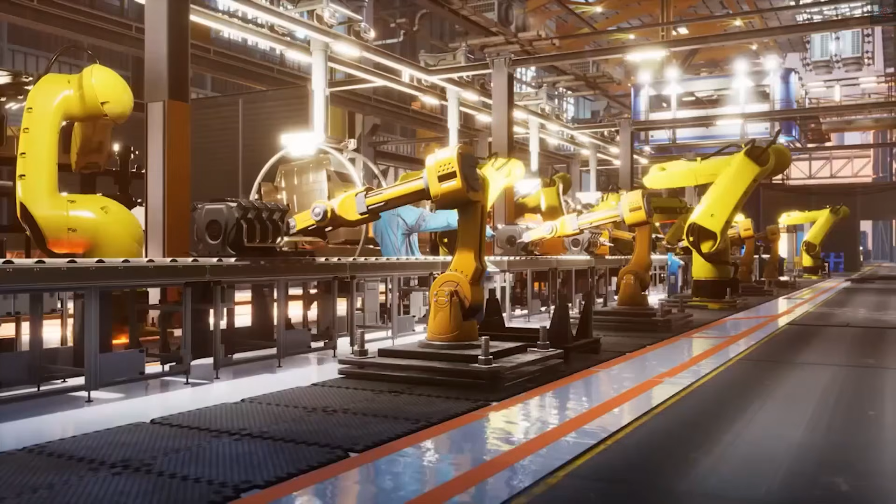Imagine a colossal industrial titan, a machine so powerful and sophisticated that it can mold massive sections of an entire automobile in a mere matter of minutes.

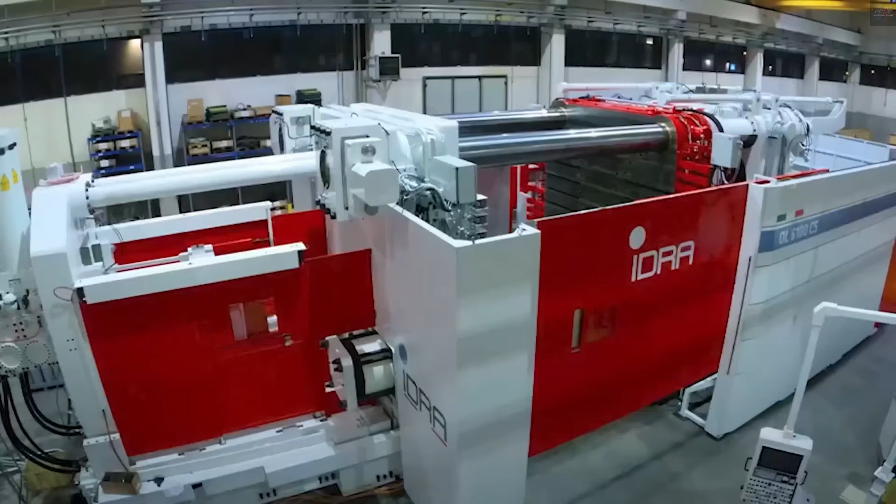This is not a scene extracted from a high-budget science fiction cinematic production. It is the unfolding reality of 2026. At the epicenter of this seismic shift is Elon Musk and Tesla, working tirelessly to redefine the very essence of how we construct vehicles. The catalyst for this transformation is the Giga Press, a piece of engineering marvel that has already fundamentally disrupted the global automotive manufacturing landscape.

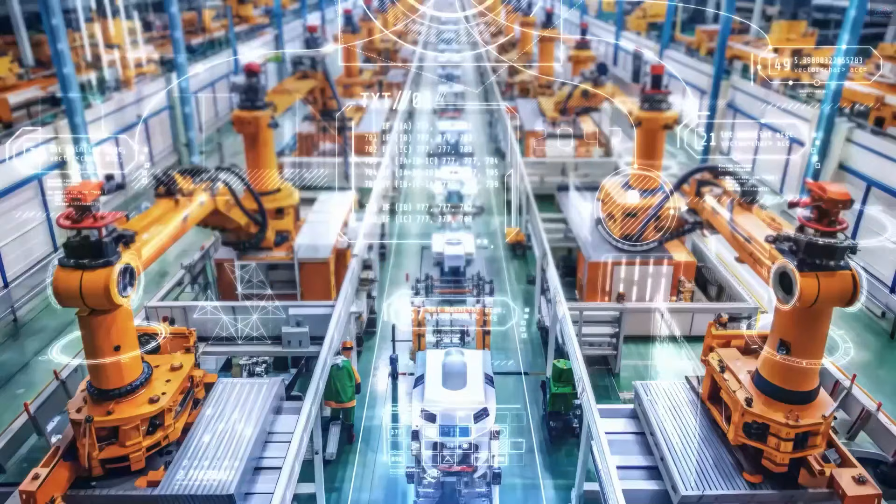In the conventional era, creating the rear underbody of a vehicle was a grueling, multi-stage ordeal requiring the meticulous joining of 70 to 100 individual components. Today, that entire complex assembly is birthed from a single, seamless casting. This technological leap translates directly into superior structural integrity, significantly reduced vehicle weight, and a production velocity that leaves traditional assembly lines in the dust.

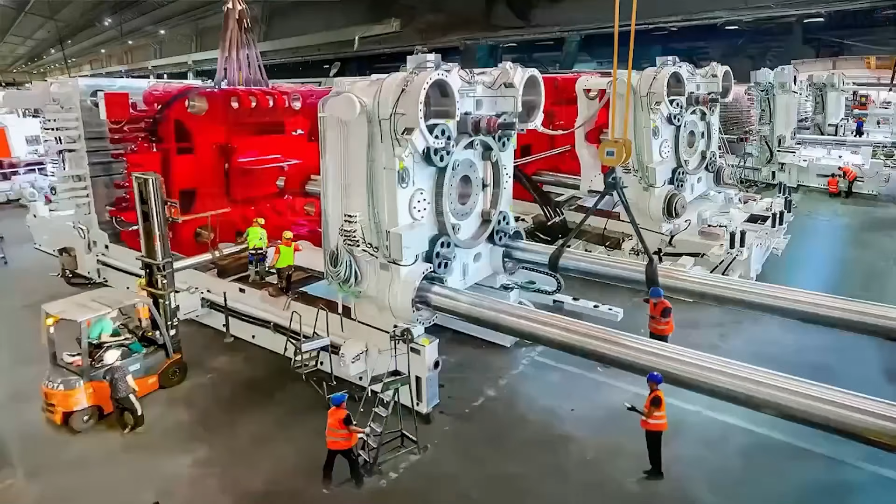However, the narrative does not conclude with current achievements. Tesla is now venturing into even more ambitious territory, developing machinery designed to cast nearly the entire skeletal structure of a vehicle in one definitive process. Consider the profound implications of such a shift. What happens when the traditional mile-long assembly line is condensed into a singular high-pressure event? What if building a car becomes as streamlined and efficient as 3D printing a consumer product?

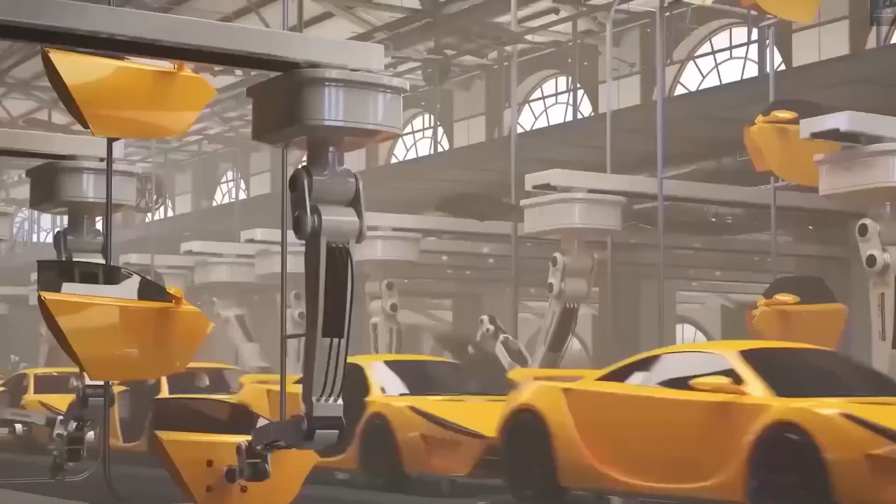This is the paradigm shift threatening to rattle the foundations of the global auto industry. But beyond the obvious gains in speed and fiscal efficiency, a critical question emerges. Will this innovation provide Tesla with an insurmountable competitive moat, or will it redefine the standard for everyone? To truly grasp this, we must look inside the belly of the beast, the Giga Press itself. How does this mechanical titan operate from within? Is it truly the ultimate manufacturing weapon of the next decade? The insights revealed in this exploration are vital for anyone seeking to understand the future of mobility.

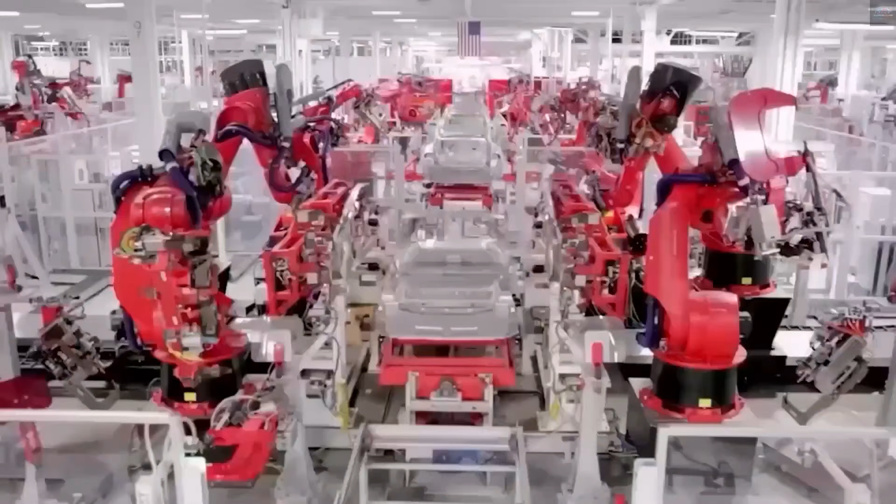To appreciate the brilliance of the Giga Press, one must first look back at the arduous nature of traditional car manufacturing. Historically, a car has never been a singular entity. It is a chaotic symphony of thousands of disparate parts, both large and small. The journey begins with the fabrication of individual elements: body panels, intricate chassis frames, suspension mounts, engine housings, and a myriad of brackets. These components are often manufactured in scattered satellite factories or sourced from a global web of third-party suppliers. Once gathered, they converge at the assembly line, where the true complexity begins.

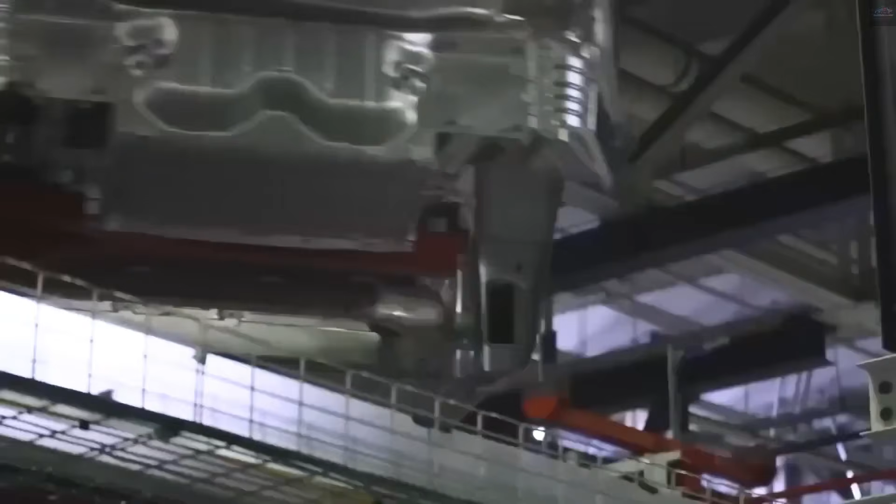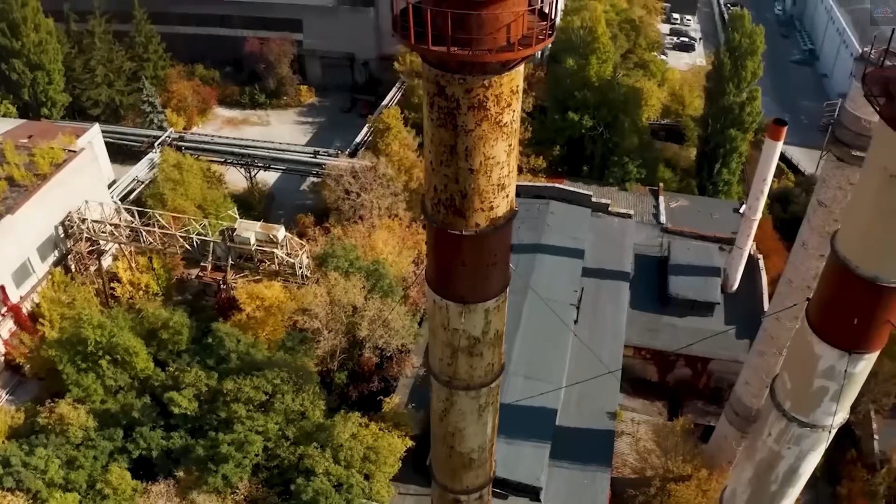This environment is a high-stakes jigsaw puzzle where every microsecond counts. At one station, robotic arms perform thousands of precise welds. At another, high-torque bolts are secured. And at yet another, panels are painstakingly aligned to ensure aerodynamic efficiency and aesthetic perfection. In a standard vehicle body, there are literally thousands of weld points. Each of these joints represents a potential point of failure or structural compromise. Wherever two distinct pieces of metal are fused, localized stress increases, creating vulnerabilities that engineers must constantly account for.

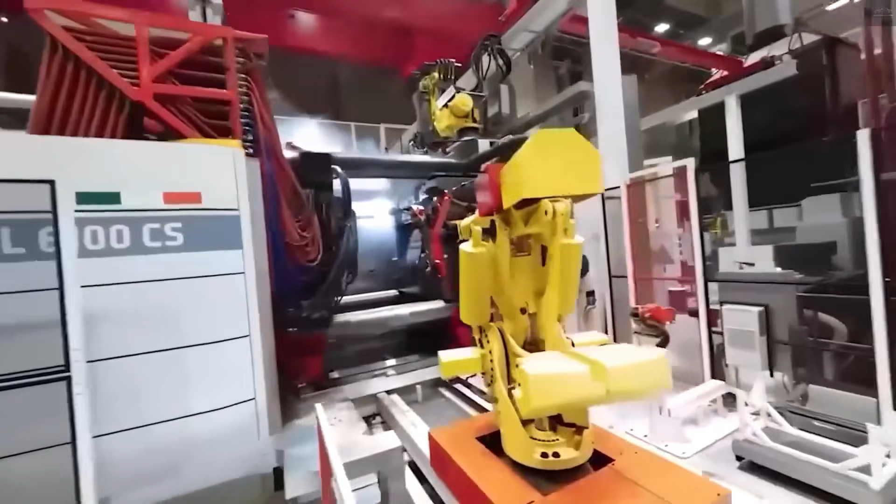Furthermore, ensuring that every single joint across thousands of units is perfectly aligned requires an exhaustive quality control apparatus. A mismatch of even a few millimeters can jeopardize the safety, harmonics, and longevity of the entire vehicle. Beyond the physical construction, the logistical nightmare of traditional manufacturing is staggering. Managing the flow of hundreds of parts, ensuring they arrive from stamping units or external vendors to the assembly line at the exact moment they are needed, requires a level of coordination that is both expensive and prone to systemic errors. Any delay in a single subcomponent can bring an entire multi-billion-dollar production facility to a grinding halt.

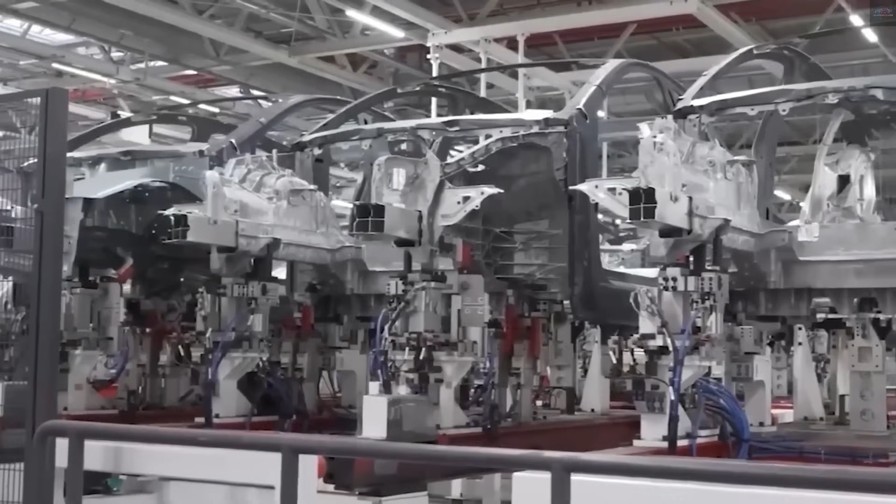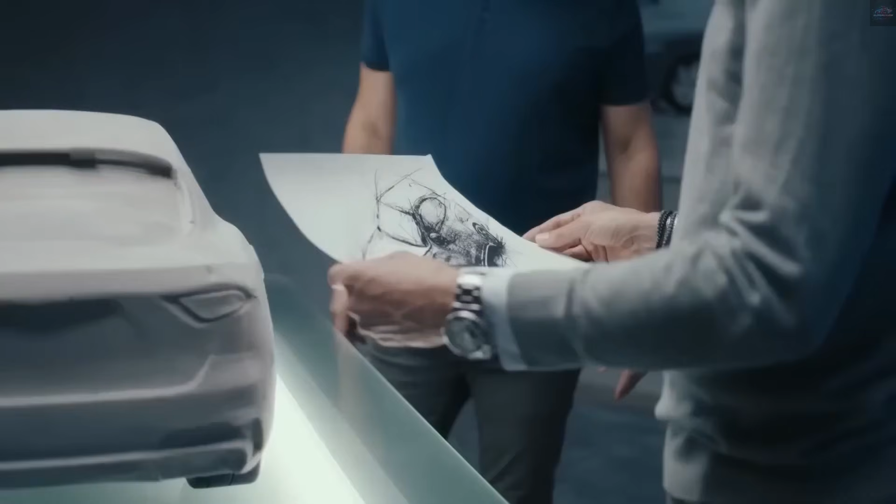This is the chaotic, fragmented reality that Tesla chose to challenge. Instead of iterating on a century-old process, they asked a fundamental, disruptive question. Why does it have to be this complicated? Tesla's philosophy was simple yet radical. If you reduce the sheer number of parts, you inherently eliminate the complexity, the weight, and the failure points associated with them. This realization birthed the era of massive die casting. By utilizing the Giga Press, Tesla replaced the nightmare of welding 80 different rear-end parts with a single, unified casting. Imagine the efficiency.

Molten alloy is injected into a precision-engineered mold under titanic pressure, and in seconds, a complete structural section emerges. No separate joints, no thousands of welds, and no logistical overhead for 80 different part numbers. The immediate advantages are undeniable.

Firstly, the structural rigidity is vastly improved because a monolithic part has no seams to crack or loosen. Secondly, the temporal savings are astronomical, as dozens of assembly steps are collapsed into one. Thirdly, the reduction in labor, floor space, and material handling leads to a significant decrease in the total cost per

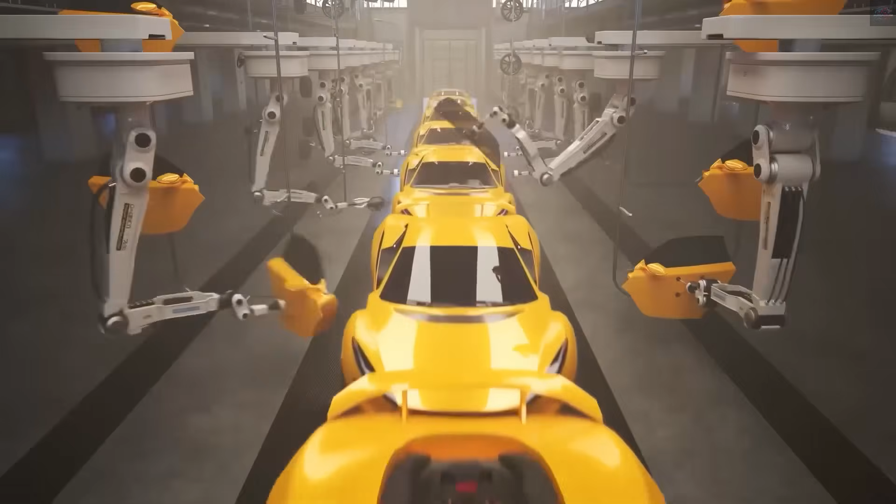unit. Tesla didn't just make a better part. They reimagined the very logic of industrial creation, proving that sometimes the best part is no part at all. What exactly is the Giga Press? The name itself sounds like something derived from a futuristic industrial manifesto, evoking images of immense weight and impenetrable complexity.

However, the core concept behind this mechanical titan is surprisingly elegant. To understand the Giga Press in its simplest form, envision it as a gargantuan molding machine. The fundamental difference between this and a common factory tool is the scale and the stakes. Instead of molding plastic toys, it is birthing the very skeleton of a high-performance electric vehicle.

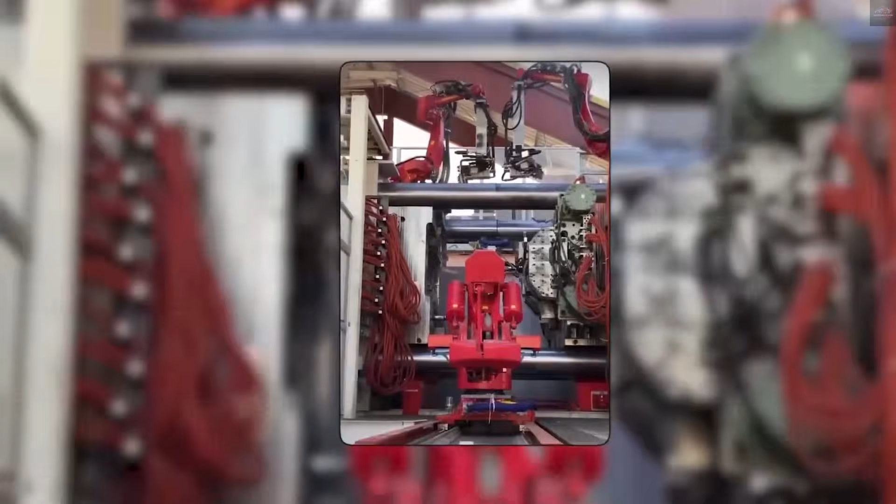Most of us remember the childhood fascination of seeing plastic injected into a mold to create a solid shape. The Giga Press operates on that exact same principle, but scaled up 1,000-fold. Instead of molten plastic, it utilizes molten aluminum alloys, and instead of a hand-sized toy, it produces massive structural sections that define the car's integrity.

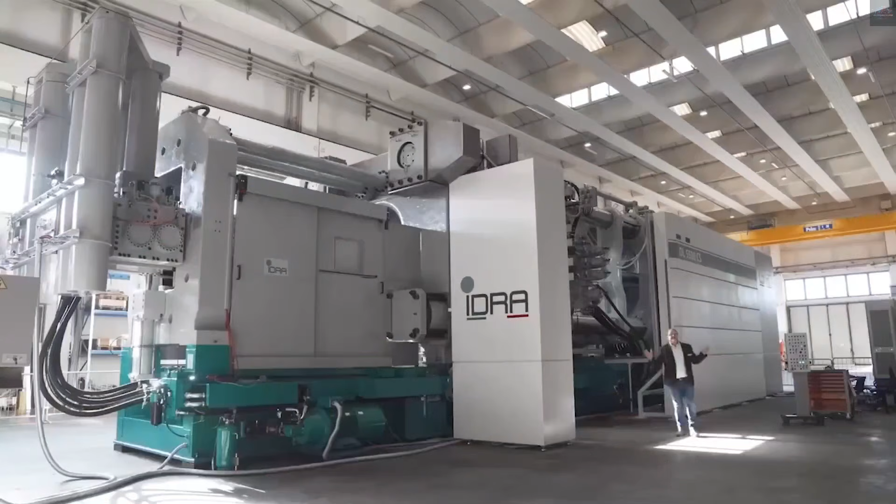Imagine a machine the size of a small suburban house. Inside this metal beast lies a massive, heavy-duty mold known as a die, which contains the intricate, negative space blueprint of a car's structural component. Into this die, molten aluminum, liquid metal heated to extreme temperatures, is injected under staggering levels of pressure.

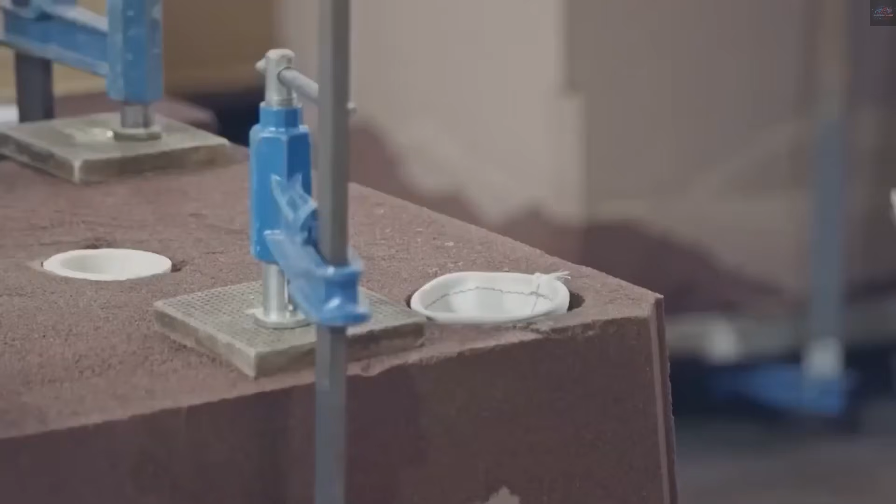This pressure is so intense and calculated that the liquid metal is forced into every microscopic crevice and corner of the mold, ensuring the final product is perfectly shaped. Within seconds of injection, the metal undergoes a rapid cooling process, transforming from a glowing liquid into a solid, rigid piece of engineering. The mold then opens and a fully formed, ready-to-use structural part is extracted.

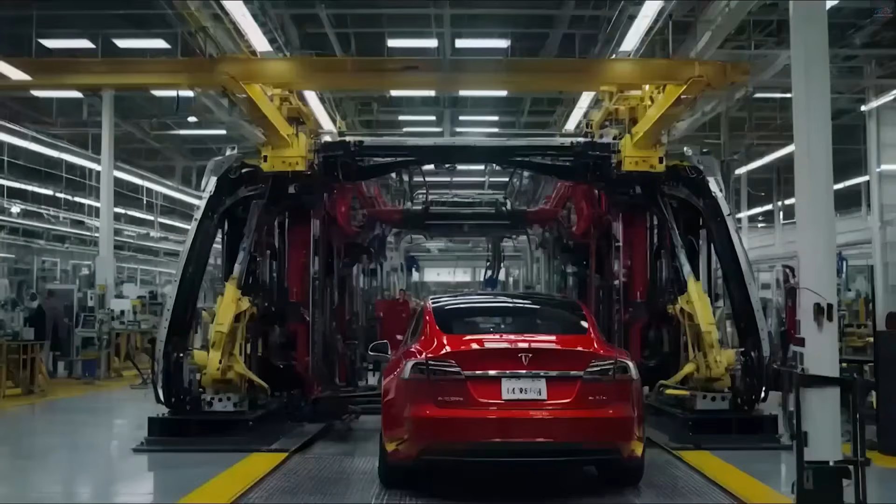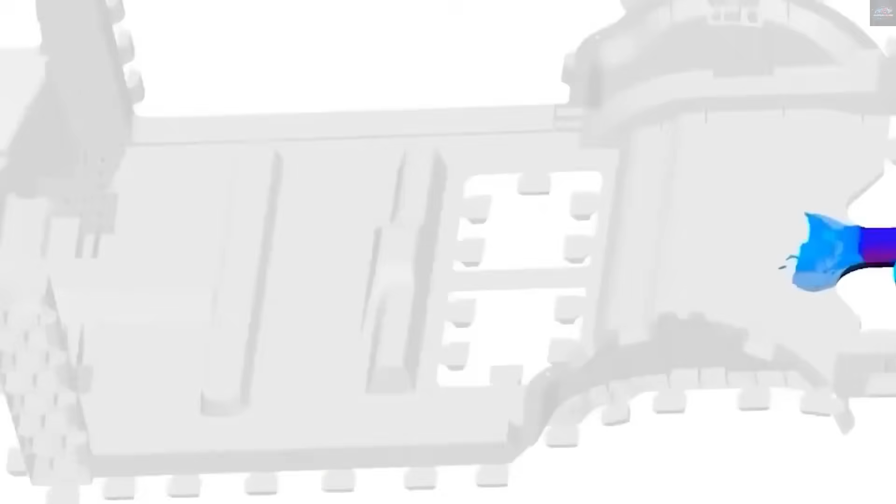This single, lightning-fast cycle replaces what used to be a marathon of welding, bolting, and manual alignment across multiple factory stations. However, we must understand that this is far from a simple pouring process. Inside the Giga Press, a sophisticated dance of physics is taking place. Temperature regulation, pressure modulation, and split-second timing are absolutely critical to the success of each cycle.

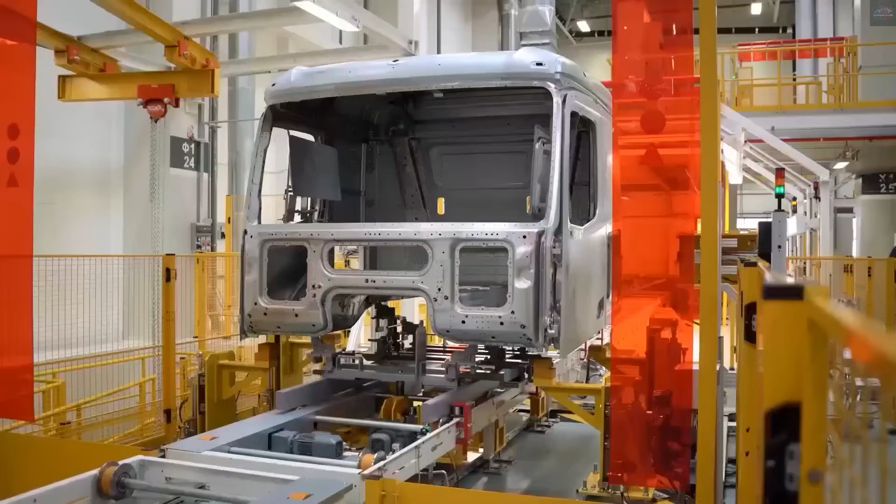If the molten aluminum is even slightly too cool, it will fail to fill the mold properly, leading to structural voids. If it is too hot, the metal's crystalline structure could be compromised, resulting in a brittle part. This is why the entire apparatus is saturated with thousands of advanced sensors and artificial intelligence-driven automation. Every millisecond is monitored to ensure that the pressure remains constant and the cooling is uniform.

Tesla has taken this decades-old die-casting technology and propelled it into a new dimension, scaling it to a level where it can produce the primary front and rear underbodies of a vehicle in one definitive shot. To put this into perspective, consider the puzzle analogy. In the traditional automotive world, building a car is like assembling a 1,000-piece jigsaw puzzle. You have to ensure every tiny piece fits perfectly with the next, and each connection point is a potential error.

The Giga Press, however, creates the entire puzzle as one solid, unified piece of metal. This doesn't just simplify the assembly. It produces a structure that is inherently cleaner, stronger, and more consistent. Human error, a significant factor in manual welding and alignment, is almost entirely purged from the equation. When a machine handles the molding, every single car that rolls off the line possesses the exact same structural dimensions and quality. There are no Monday morning cars with slightly misaligned frames.

Yet, we must not mistake this efficiency for simplicity. Behind the scenes, the engineering requirements are monumental. Designing a die that can withstand such extreme thermal and physical stress for thousands of cycles requires high-level materials science. Managing the complex cooling systems that prevent the metal from warping as it solidifies is a feat of thermodynamics.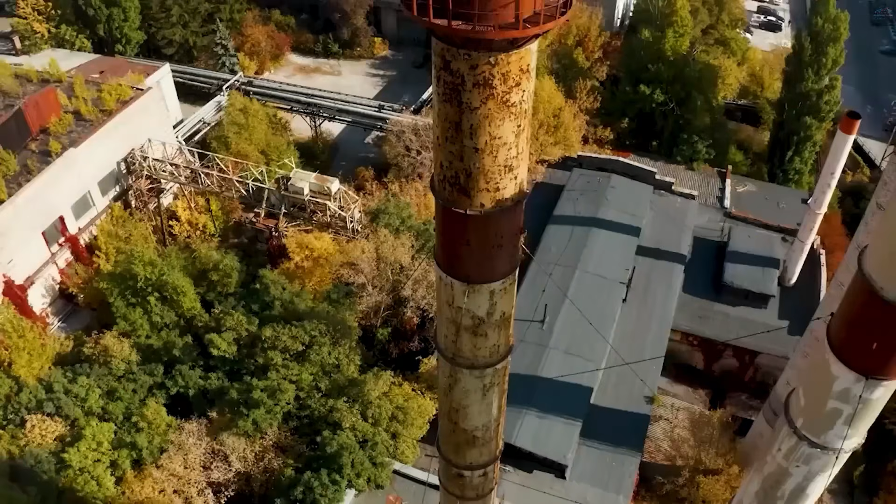The journey from 100 parts to one part is not just an improvement. It is the death of the old way of thinking. We have arrived at the pivotal moment where the theoretical brilliance of the Giga Press meets the harsh, practical reality of the global market. This is where the game truly changes, transforming the Giga Press from a mere industrial tool into a full-scale manufacturing revolution.

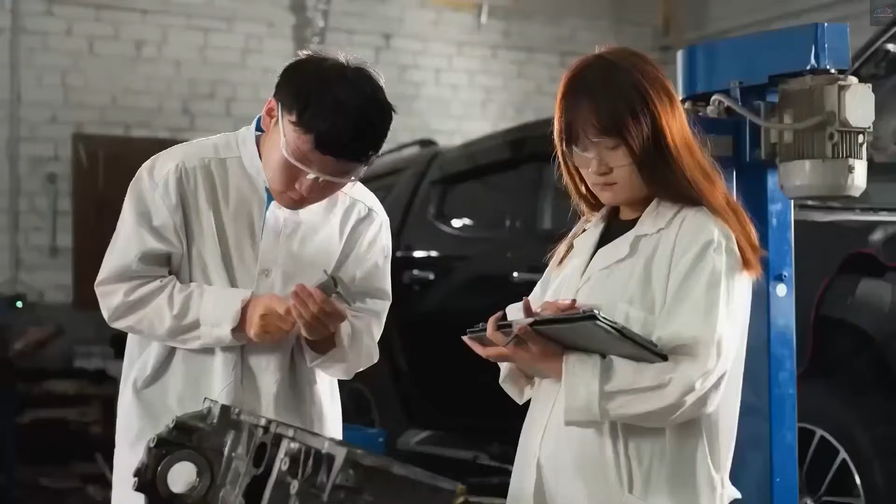To grasp the magnitude of this shift, one must envision the transition from 100 components down to a single, unified entity. In the legacy automotive world, constructing a major section like the rear underbody was a logistical and mechanical nightmare. It involved 70 to 100 distinct parts, each requiring its own stamping die, its own supply chain, and its own specialized welding robot. Now, that entire chaotic assembly is condensed into a single casting. This is the ultimate simplification through innovation, and its impact is felt across three major pillars: strength, time, and capital.

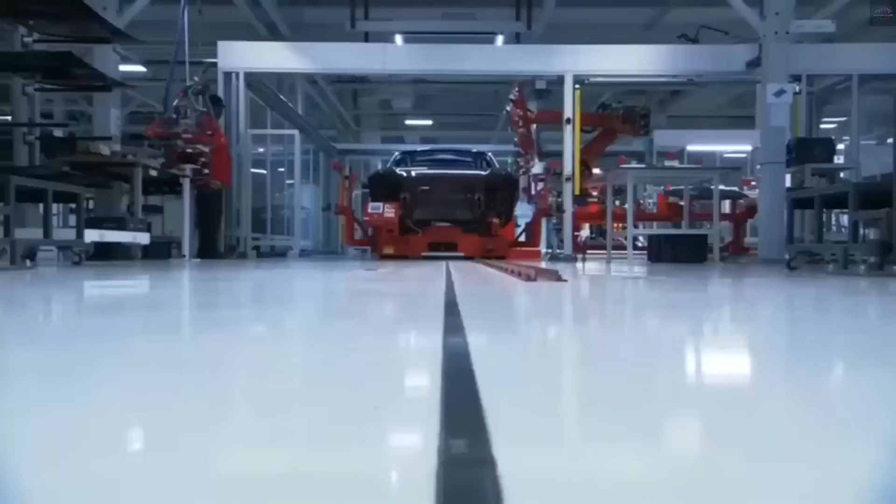First, let us examine the concept of structural integrity. When a car frame is composed of 100 different pieces joined by welds and bolts, every single joint acts as a potential failure point. No matter how advanced the robotic welding is, a joint will never possess the same molecular consistency as a solid piece of metal. By casting the section as a monolithic block, Tesla has created a structure that is inherently more rigid and durable. This provides a massive advantage in vehicle safety.

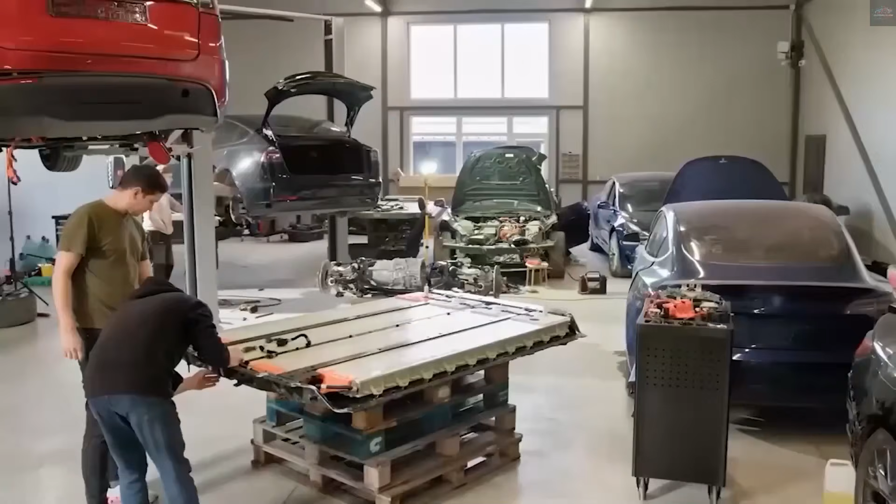During a collision, the kinetic energy is distributed across a continuous metal structure rather than being concentrated at weld points that might snap or shear. This leads to better crash test ratings and a more stable driving experience, as the car's frame resists twisting and vibration more effectively than a multi-part assembly ever could.

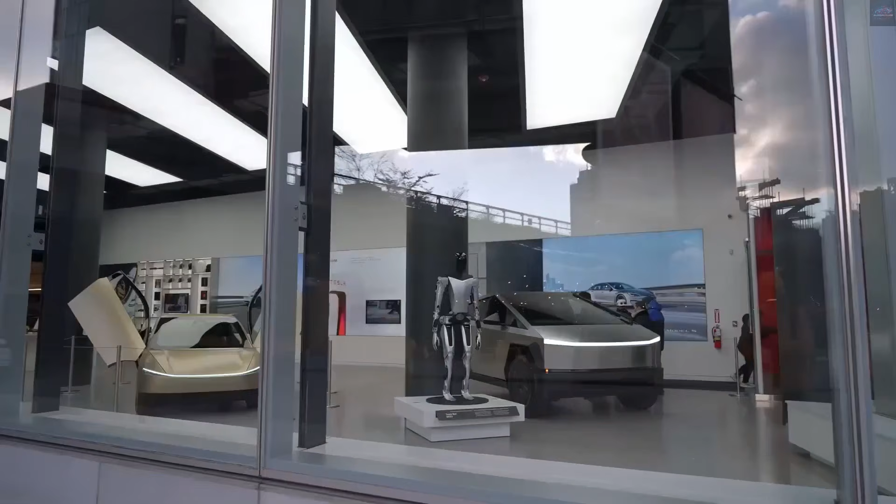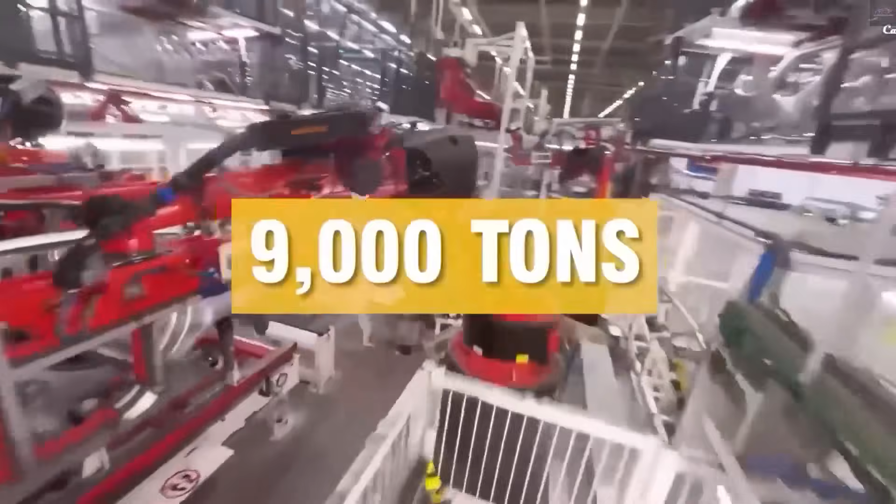Secondly, the acceleration of production speed is staggering. In a traditional factory, the time required to move parts through dozens of welding stations, align them, and verify the integrity of thousands of spots adds hours to the build time of a single vehicle. With the Giga Press, these steps are deleted from the timeline. The production line becomes shorter, the factory floor footprint shrinks, and the output per square foot of factory space skyrockets. This allows a company to scale its operations at a pace that traditional manufacturers, burdened by legacy processes, simply cannot match. It is the difference between writing a book by hand and using a high-speed printing press.

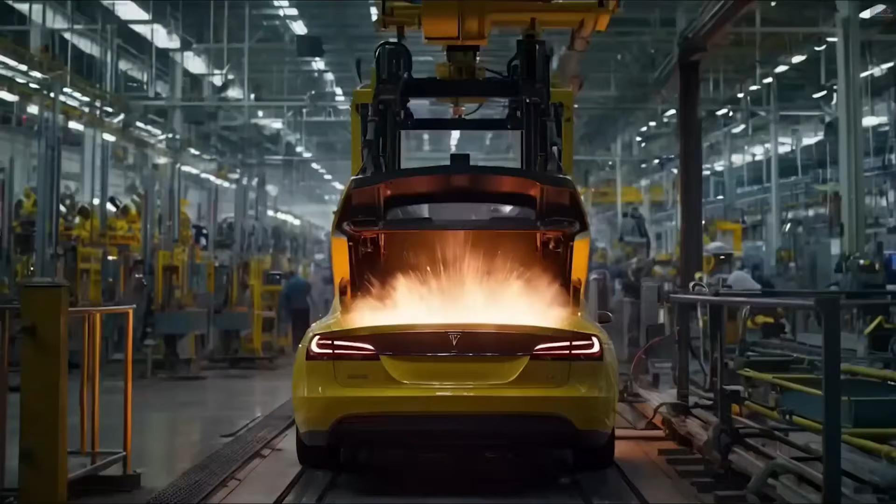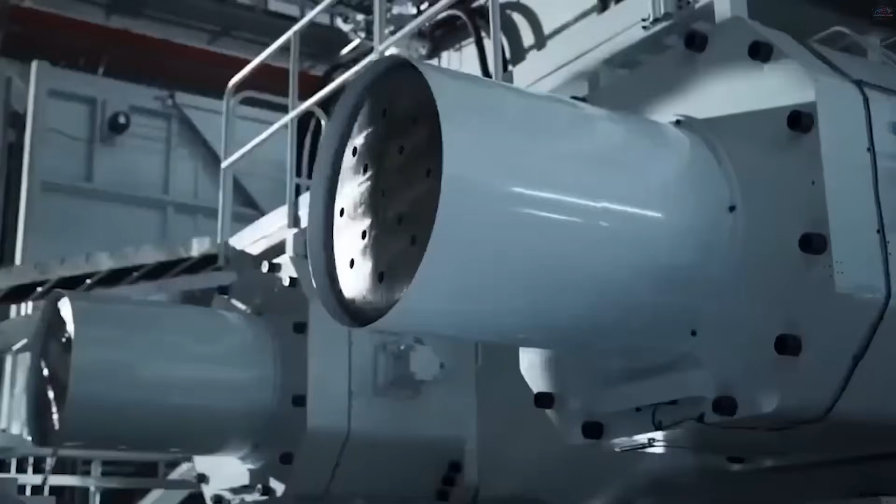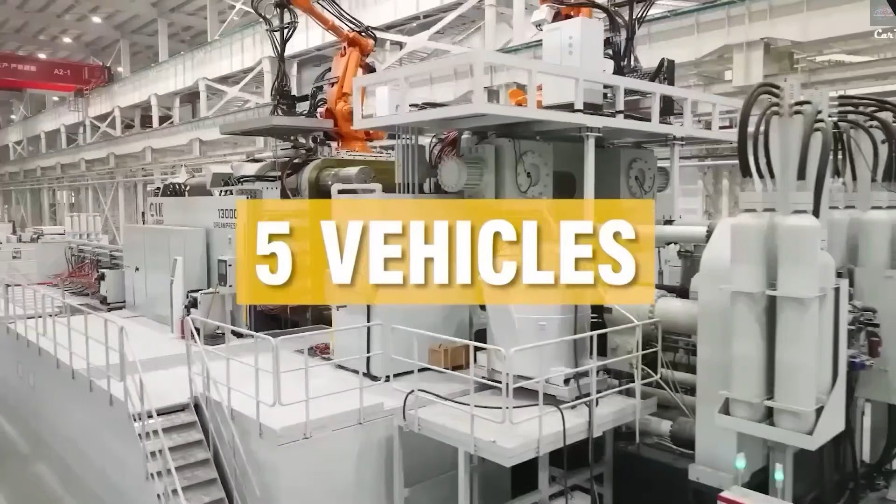Thirdly, we must consider the financial implications. Reducing the part count by 90% leads to a massive reduction in raw material handling, labor costs, and energy consumption. Fewer machines running means lower maintenance costs and less power usage. This efficiency gives Tesla a dual-edged sword in the market. They can either enjoy significantly higher profit margins than their competitors or lower their prices to a point where traditional manufacturers cannot compete without losing money. This is the cost moat that is currently causing panic in the boardrooms of legacy car brands. They are realizing that their entire infrastructure is built on an obsolete, more expensive logic.

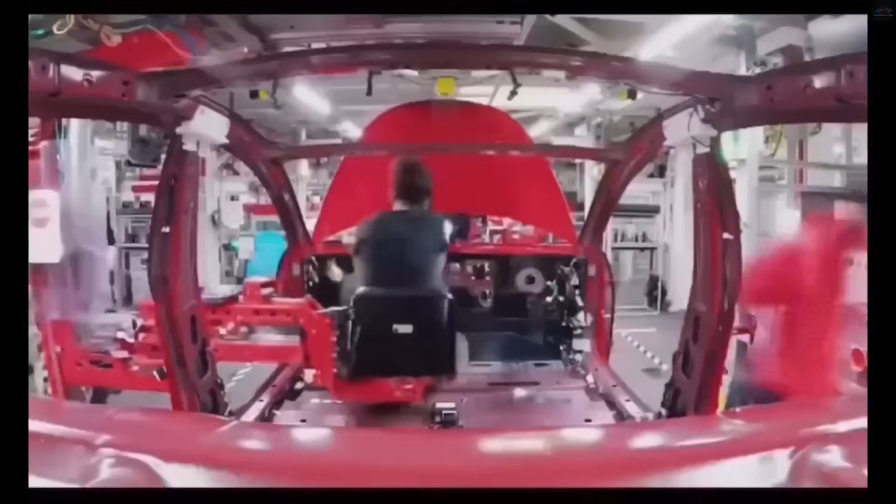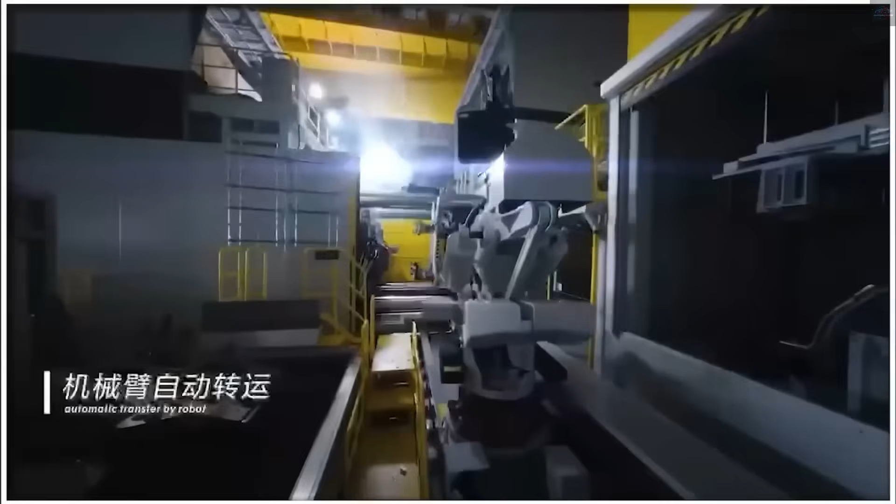However, every technological leap comes with a set of hidden complexities, and this is where the story becomes nuanced. While the Giga Press is a dream for manufacturing, it presents a potential nightmare for repairability. In the old system, if a car was involved in a minor rear-end collision, a technician could cut out a small damaged panel and weld in a new one.

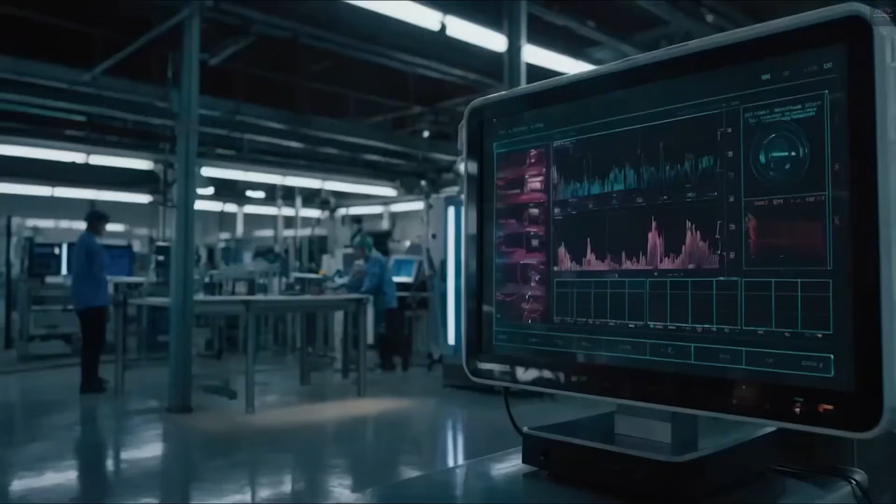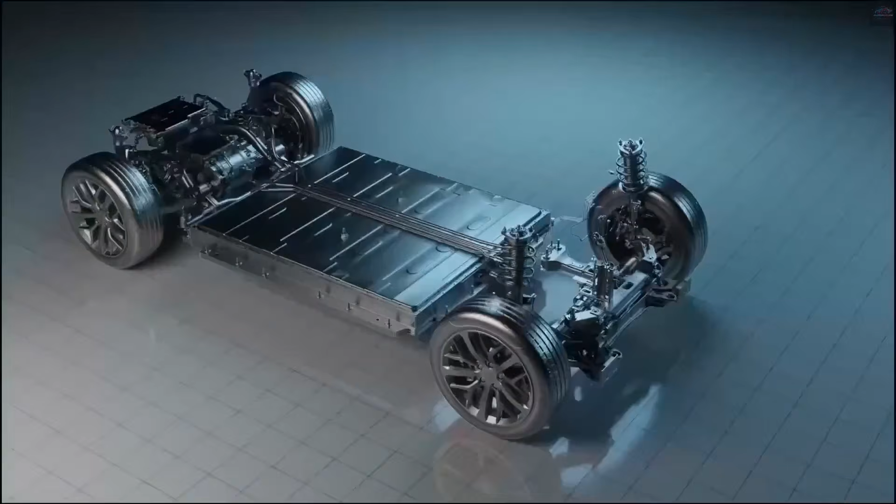But when the entire rear structure is a single, massive casting, a significant dent or crack could potentially compromise the whole unit. In some scenarios, what would have been a simple repair could now lead to the entire vehicle being totaled by insurance companies because replacing a primary structural casting is far more complex and expensive. This raises serious questions about the long-term cost of ownership and the sustainability of disposable structural engineering.

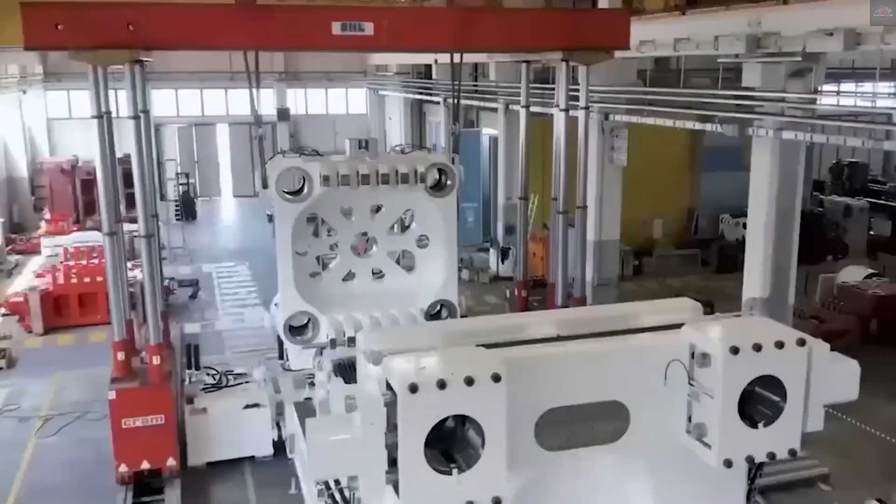Furthermore, we must look at how Tesla is applying this in the real world today. This isn't just a pilot project. It is the backbone of the Tesla Model Y. In their gigafactories in Texas and Berlin, Tesla utilizes machines with clamping forces ranging from 6,000 to 9,000 tons. To visualize this, imagine the weight of the Eiffel Tower being concentrated into a single hydraulic press.

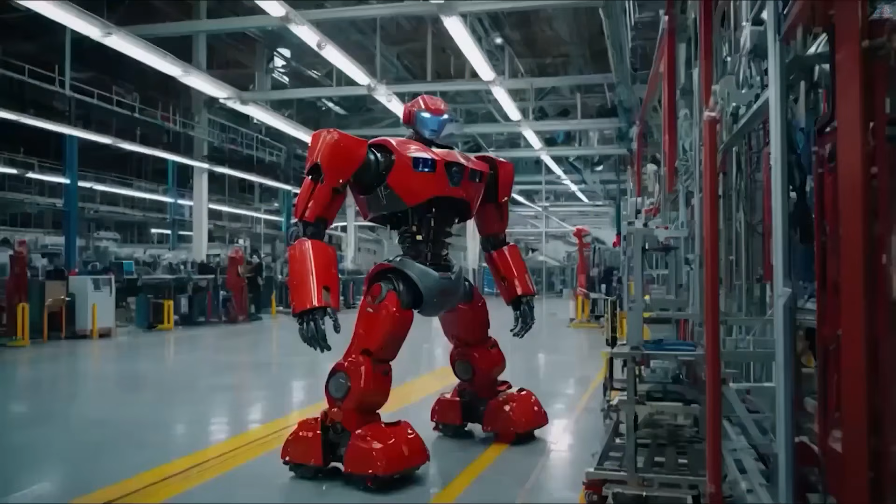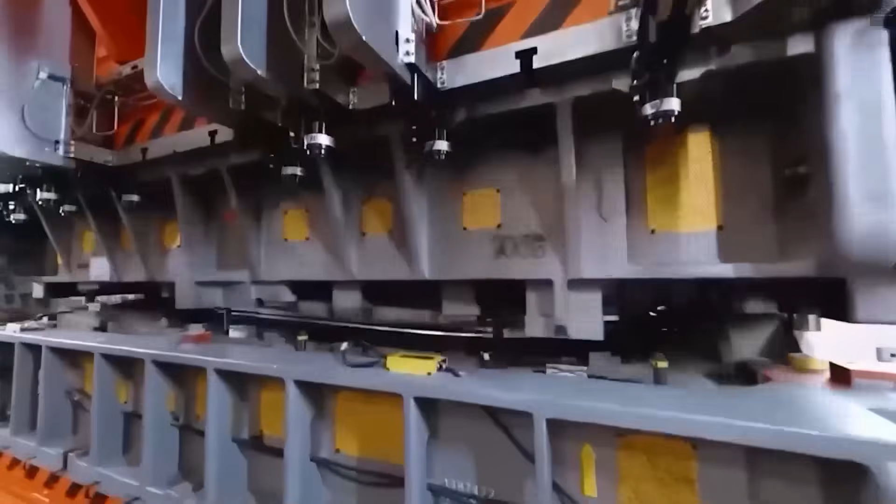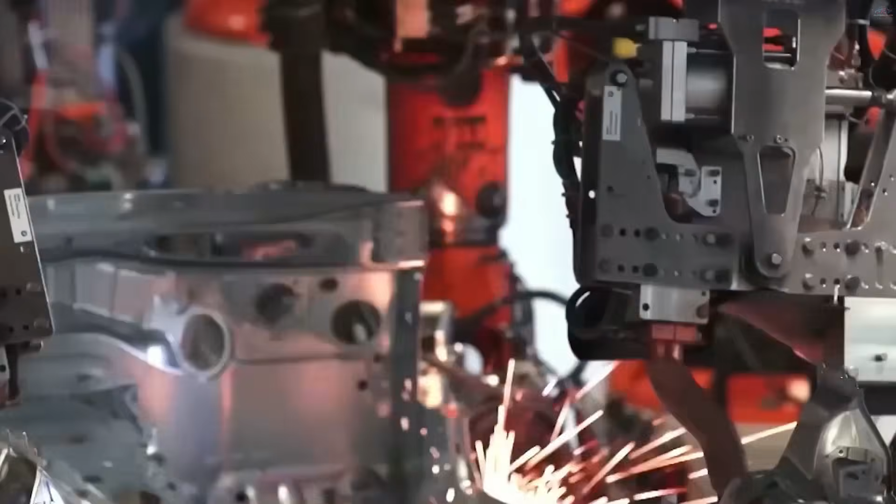Imagine the factory of the future. Instead of a mile-long corridor filled with hundreds of welding robots and thousands of sparks flying every second, you see a compact, ultra-automated facility centered around a few massive casting cells. On one side, raw aluminum ingots are melted. On the other, a complete car chassis emerges every few minutes.

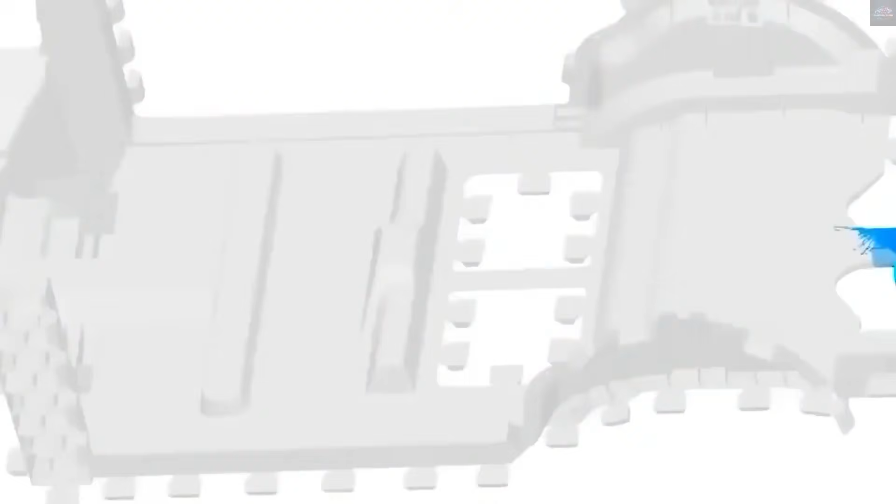This radical consolidation would shrink the physical footprint of a factory by nearly 40%, drastically reducing capital expenditure and energy consumption. For Tesla, this isn't just about making cars. It's about making the machine that builds the machine more efficient than anything the world has ever seen. By eliminating the need for hundreds of individual stamps and subassemblies, they are stripping away the very layers of complexity that have traditionally protected legacy automakers from new competition.

However, as we venture into this one-piece car era, we must confront the sobering reality of the hidden risks that no one in the hype cycle wants to discuss. The first and most prominent danger is the all-or-nothing nature of massive casting. In a traditional setup, if a small bracket or a single panel has a defect, you simply discard that $5 part. But when your entire rear chassis is a single, expensive casting, a microscopic crack or a pocket of trapped air can ruin the entire unit.

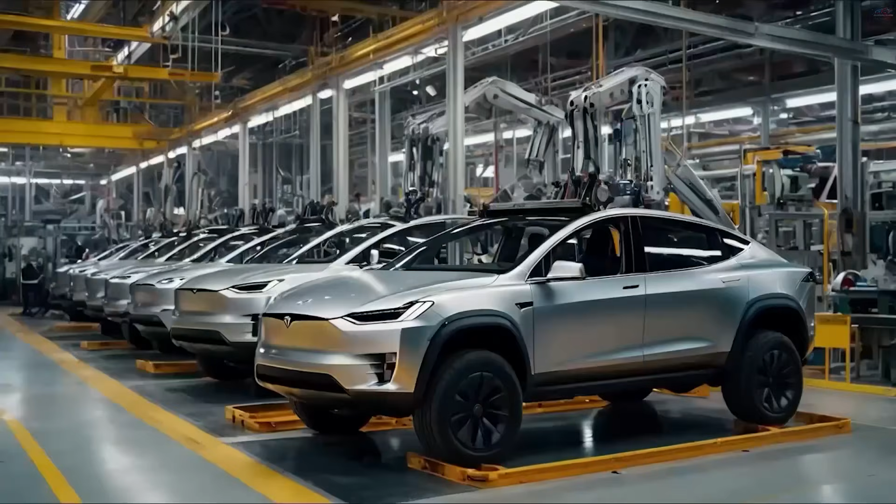As the size of the casting increases, the probability of a defect, known as porosity or cold shuts, multiplies exponentially. This means that a tiny error in temperature or pressure doesn't just waste a part. It wastes a massive amount of high-grade alloy and stops the entire production flow. Tesla is betting billions that their AI-driven monitoring can keep these defect rates low enough to remain profitable.

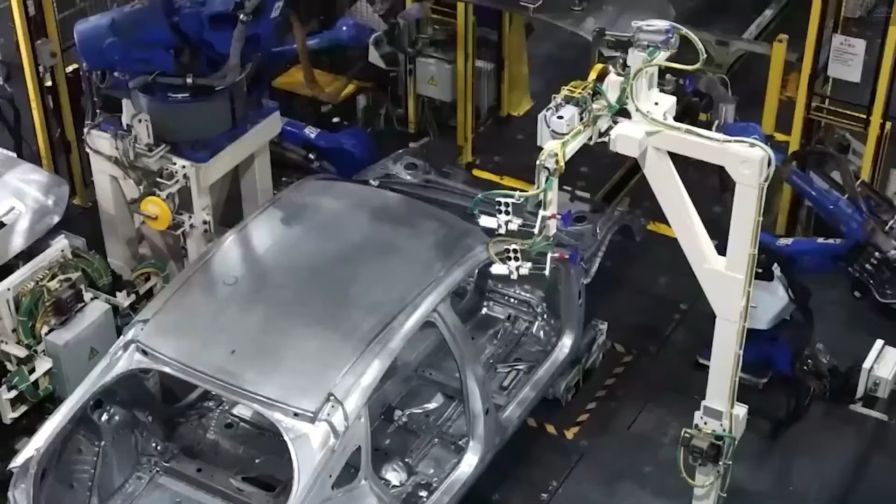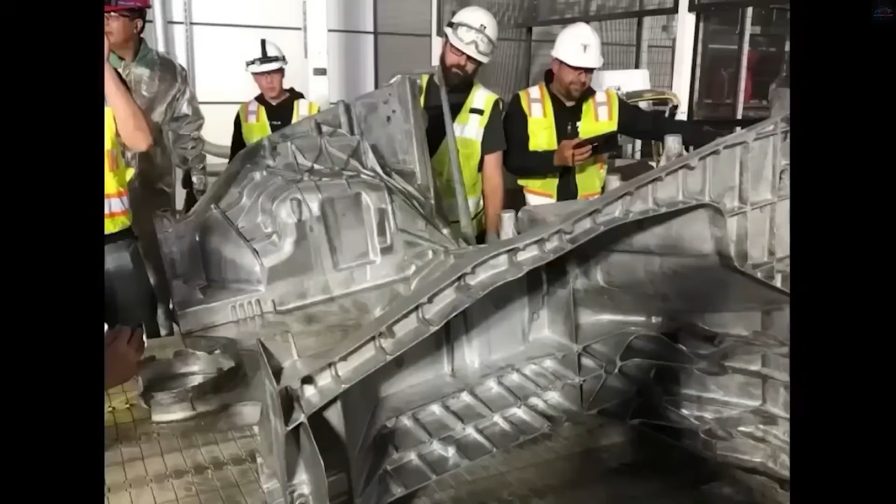Then, there is the issue of design rigidity. Traditional manufacturing is surprisingly flexible. If an engineer needs to change the shape of a small internal bracket to improve safety or accommodate a new sensor, they only need to modify one small tool. In the world of gigacasting, the die or the mold is a multi-million-dollar piece of precision machined steel that takes months to produce. If a design flaw is discovered after the Giga Press is operational, or if market tastes shift rapidly, the cost and time required to retool are astronomical.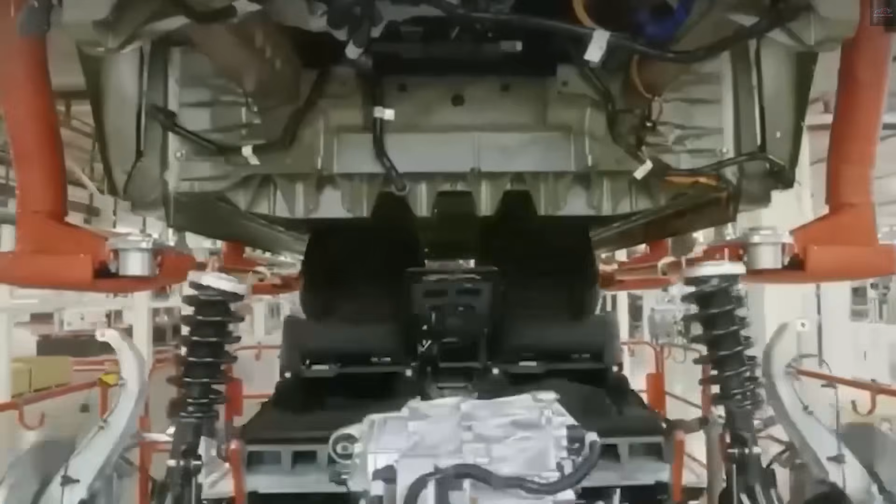This creates a paradox. While the Giga Press makes production faster, it makes design iteration slower. Tesla must get the design 100% right from the very beginning, as there is very little room for error or on-the-fly adjustments.

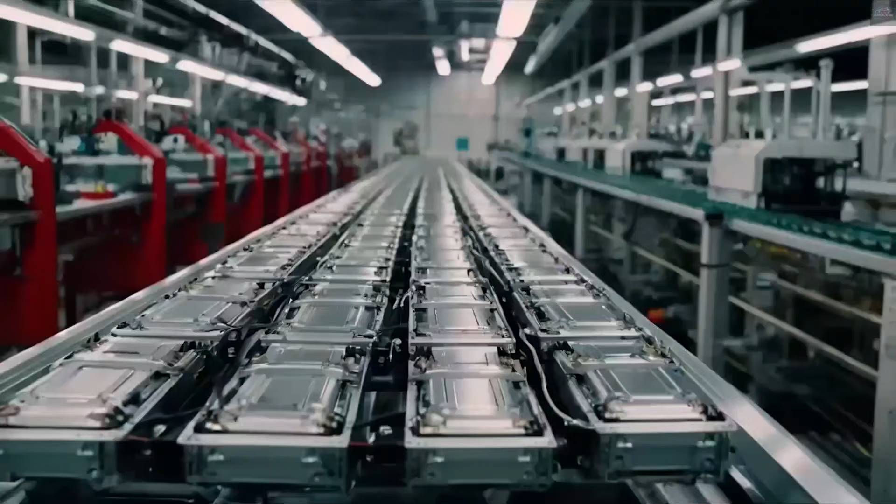Beyond the factory walls, the crash and scrap dilemma remains a significant concern for the consumer. While a single-piece frame is incredibly strong, it lacks the modularity of older cars. In a high-impact collision, energy is absorbed through the entire monolithic structure. If that structure deforms, it cannot be straightened or patched in the way a multi-part steel frame can. This could lead to a future where even moderate accidents result in a car being written off by insurance companies, potentially driving up premiums and lowering the resale value of these high-tech vehicles.

The long-term durability of these massive aluminum castings under the stress of millions of road vibrations is also a field of study that is still being tested in real time by current Tesla owners.

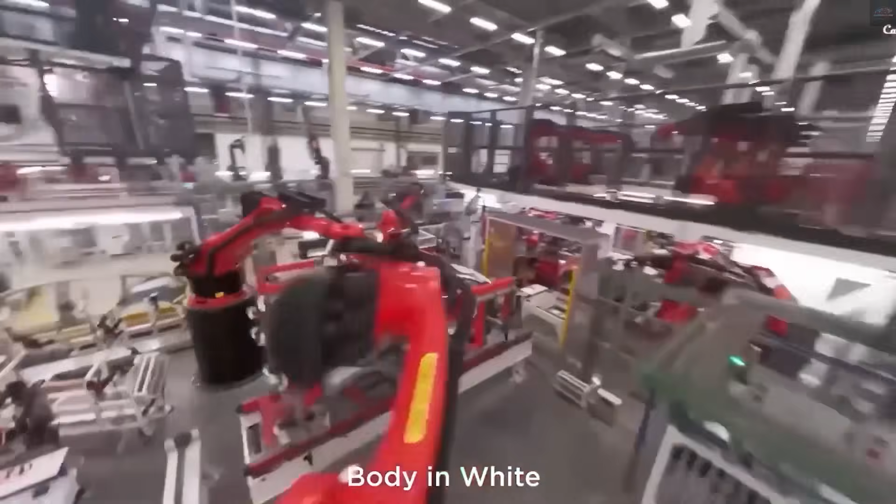In conclusion, the Giga Press is the ultimate manufacturing weapon, a bold, high-stakes gamble that has allowed Tesla to outpace the world. It is a masterclass in engineering simplification that proves that the most efficient part is the one that doesn't exist. Yet, it also brings a new set of centralized risks, from massive retooling costs to complex repairability issues.

Whether this technology becomes the universal standard for all car makers or remains a specialized, Tesla-only advantage depends on how these risks are managed in the coming years. One thing is certain: the era of the Lego-style car assembly is fading, and the era of the molded machine is here to stay.